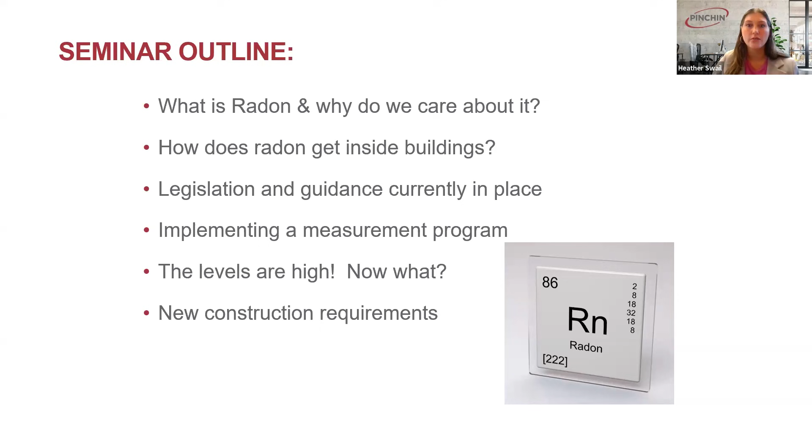And then finally, we'll wrap up with some of the new construction requirements that are in place for new buildings that we're building, and some proactive radon design considerations. That is our agenda for today.

So let's start with the basics. What is radon? You've definitely heard of the word because you're in this presentation today, but radon is a naturally occurring radioactive gas, and it forms as part of the decay process of uranium in soil, in rock, and in water. Even though it's a natural part of the environment, it's important to note that it's colorless, it's odorless, and it's tasteless. So we don't know if it's here without testing.

I think that's another reason why not everyone is an expert at radon already, and why not everyone knows the risks associated with it, is because we don't have someone to blame in this scenario. It's natural. The air you're breathing right now has radon in it. The problem is when it gets to really high levels and gets trapped in buildings, that's when it becomes hazardous. But when I compare it to asbestos, which I did earlier, that's something we put into buildings. That was something we could blame. But this is natural. It's something that was really no one's fault. It's just something in the air that we are breathing.

So as I said, radon is in virtually all of the air we breathe. It's indoors and outdoors. The issue is when it accumulates inside and we get those really high levels. That's when we see the significant health risks associated with radon, which we'll talk about on the next slide. Understanding this lays the foundation for the next sections, which we'll talk about, and we'll also go through how to measure it and mitigate it effectively.

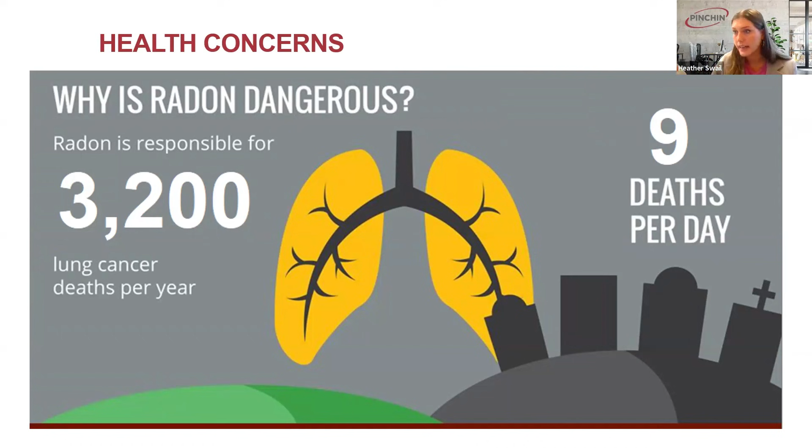So getting into the health concerns, let's take a closer look at how it impacts our health. I mentioned when radon breaks down, it releases radon decay products, or RDPs. They're tiny radioactive particles that can attach to your lung tissues when you inhale air. The RDPs continue to break down, releasing alpha particles, which is a form of radiation. These are highly energetic and cause significant damage when they come in contact with your very delicate lung cells. Over time, this leads to damage and mutations, which can increase the risk of developing lung cancer, particularly if you've had long-term exposure to these elevated radon levels.

And unfortunately, if you've ever met someone who's been diagnosed with lung cancer but never smoked a cigarette in their life, radon was likely the cause of that illness in that case.

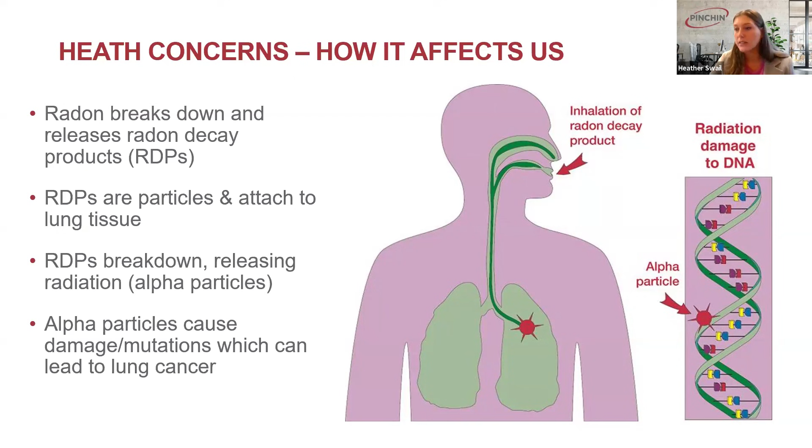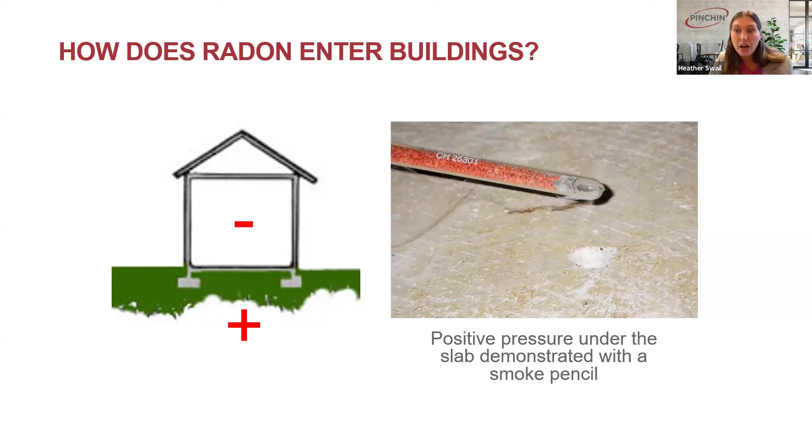In this slide, we show the concept of using a smoke pencil, which shows the movement of air and gas, making it a little more visible. You can see in this picture it actually looks like a neutral pressure. The smoke is slightly flowing to the side. I'm not sure if you can see my cursor, but it's definitely not going underneath the slab.

Whereas in this slide, this is what happens when a building is under positive pressure and the ground beneath the slab is under negative pressure. In this case, that's due to the installation of a radon mitigation system, which is creating a negative pressure underneath the building slab, pulling the radon gas from the soil and redirecting it away from the building through a venting system, which we'll talk about later in more detail.

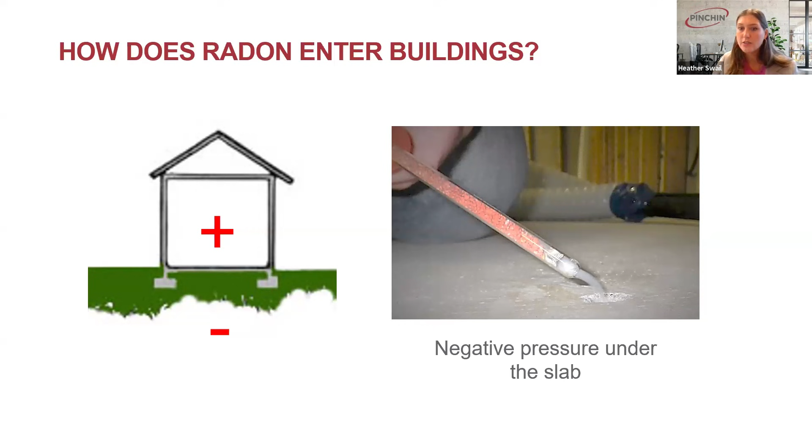But it's very effective. You can see in the smoke pencil on this slide, the smoke is very easily being sucked down through the foundation. This really shows the effectiveness, with your eyes, of how well radon mitigation systems work in a building.

One of the primary reasons revolving doors were invented was to manage air pressure differences between inside and outside buildings, especially for larger structures like high-rise buildings. Buildings with significant height or advanced HVAC systems often have pressure imbalances due to factors like wind, mechanical ventilation, or temperature differences. When buildings are under positive pressure, there's higher pressure inside compared to outside, so air naturally pushes outdoors and can make conventional doors difficult to open and swing.

They act like a barrier almost against escaping air. You may have noticed this before if you've ever opened the door to a building and it feels like a gust of wind is blowing out at you. That is the pressure effect. So that's why revolving doors were invented for these issues, so you don't get the feeling of being sucked in or pushed out of a building, depending on its pressure.

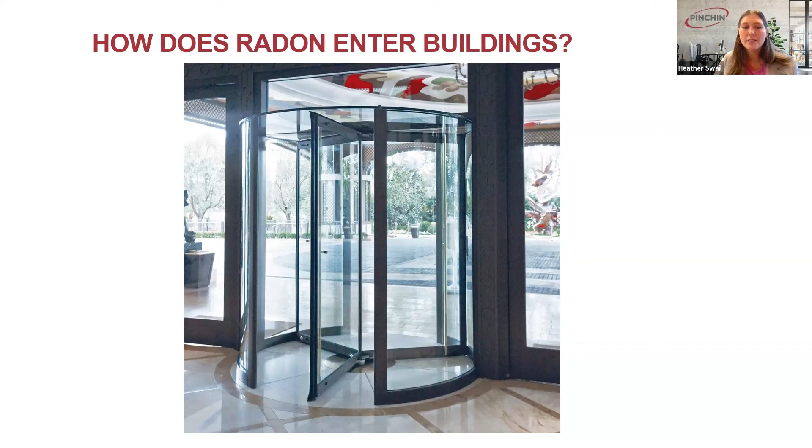Crawl spaces and sump pits are areas often exposed directly to soil, making them a significant source of radon entry. Porous concrete and masonry as well -- even solid-looking materials can allow radon to pass through. And finally, water sources: radon can dissolve in water supplies, particularly in areas with high levels of radon in the ground. This could be common in well water, which would release radon into the air during activities like showering, doing laundry, or washing dishes.

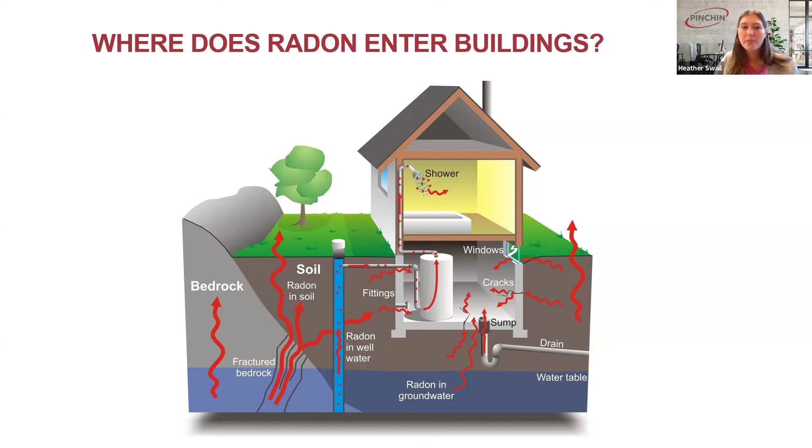Oh, sorry guys, I went backwards there.

The next slide is similar, but has one other visual I like. Footings and floor drains are also natural gaps in construction, which are connected to the soil area and usually unsealed, so that's another channel for radon.

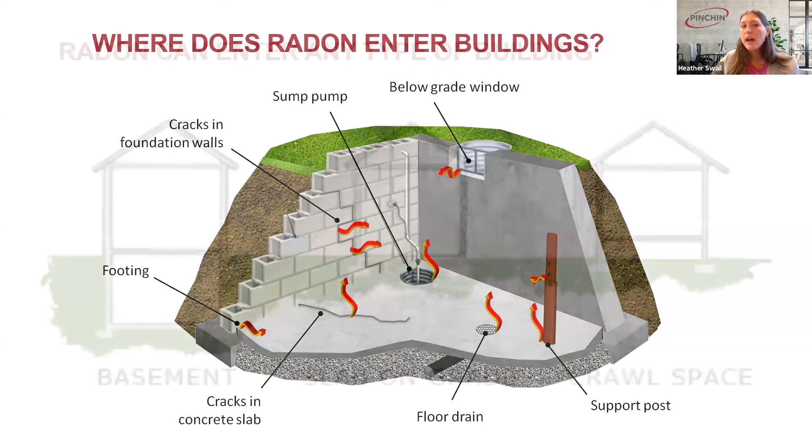So all of these points show that even the most well-sealed building has the risk of having elevated radon. It's important to understand that radon does not discriminate by type of building. Regardless of construction or foundation type, radon can be equally prevalent in a building with a basement, slab on grade, or a crawl space. The key takeaway is that radon entry points do exist, and the only way to determine if radon is inside your building is to test it.

One little joke I tell in some of these presentations is that there's really only one building I would recommend you don't need to test. If anyone on the line wants to get creative and throw in the chat what they think that building would be, we'll see if anyone's brains are turned on. I'm on the West Coast, so it's pretty early for me, but maybe the East Coasters are a little more awake and creative.

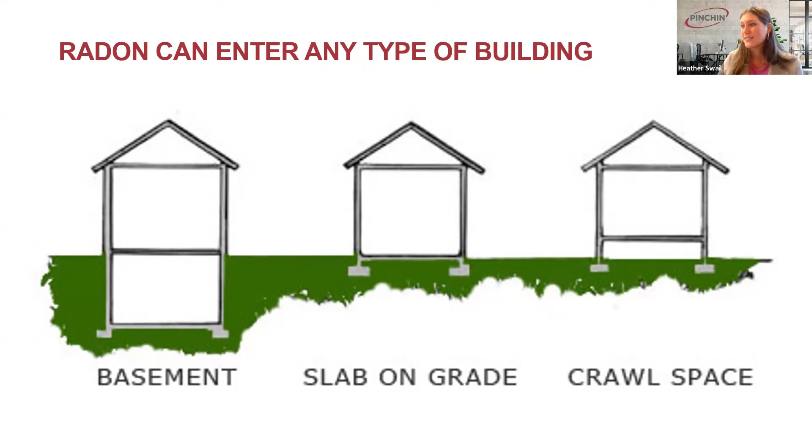Excellent, Chris typed in a floating house, and that's exactly right. So if it was a tree house or a house on stilts, yes, if there is no contact with the ground, there is not a risk of radon. That would be the lowest risk to test. But if your building is in contact with the ground, radon testing is what I would suggest. Thanks for participating, Chris, I appreciate that.

Now we'll talk about how radon is distributed throughout a building. The highest concentrations are usually in the lowest level, which could be a basement or your first floor, depending on the building layout. That's because that level is closest to the ground where radon originates, and it's often closest and connected to radon pathways, like the sump pump or cracks in the foundation, as mentioned earlier.

As we move up the building, to the next floor up, radon levels usually dilute from 40 to 60% lower than the floor below. That reduction occurs because of dilution, as the radon starts to get mixed with the other air in the building. Also, mechanical ventilation is usually on the main floor, which can help disperse radon.

As we move up further to the second floor and above, we're close to outdoor levels. The radon has been even further diluted as it travels upward, and it's furthest from the source. So as we move up a building, we get less and less radon. Another interesting thing to point out is if your building has elevators — elevators can distribute radon throughout the building, as it sucks up the air with it.

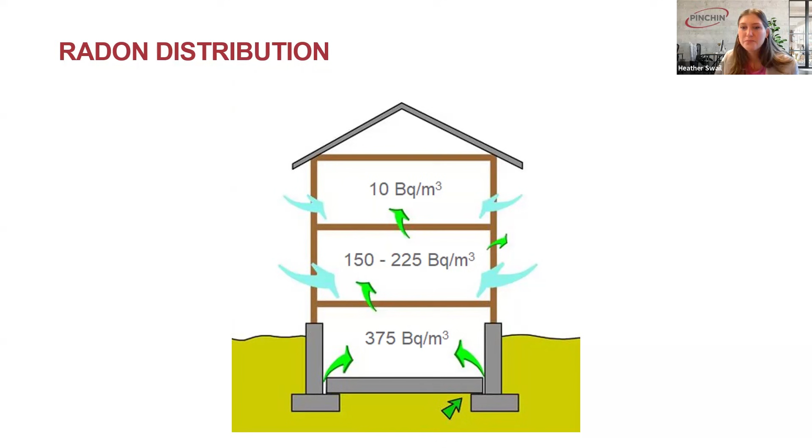When we talk about a comprehensive radon testing program, it's really essential to understand that one test is not sufficient for testing your building and knowing if you have a radon problem. It could have been very easy in this school to have missed a large problem if we'd only deployed one or even several detectors — we could have easily missed the problem here. I've had some questions in this presentation before about why this happens, and there's a couple of possibilities in this case. One is the proximity to radon entry points.

Rooms located near cracks in the foundation or utility penetrations, or areas poorly sealed like sump pits and crawl spaces, are more likely to have elevated radon levels. There's also ventilation differences between rooms.

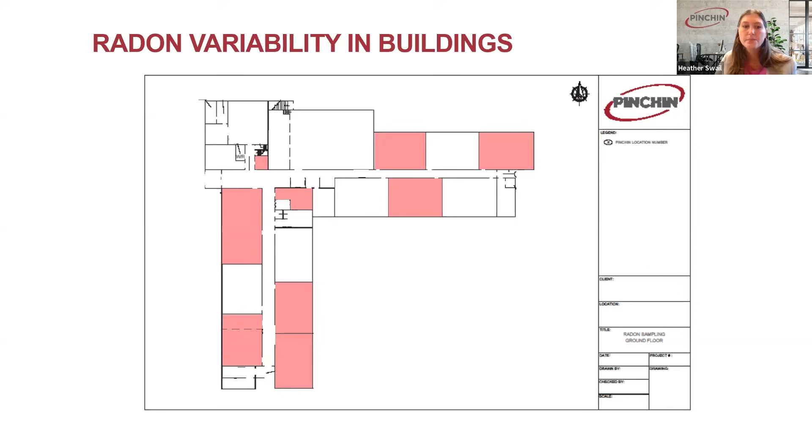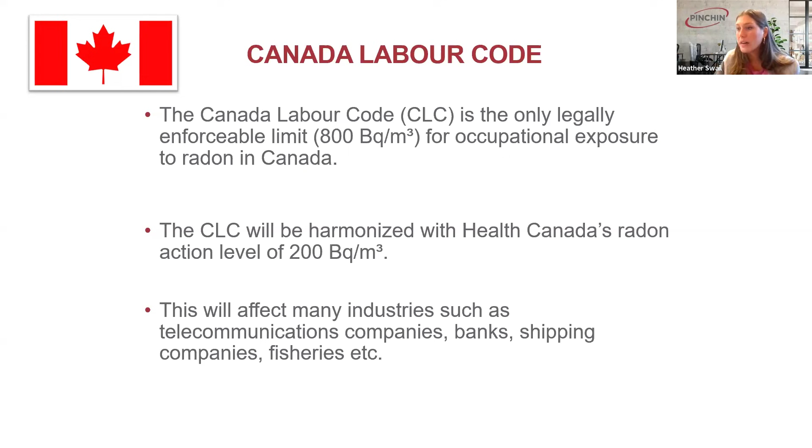Hey Heather, just to interrupt you for a second, there's a question in the crowd. There's a question asking what the units of radon concentration are. In Canada we use becquerels per cubic meter—you are a very critical thinker on the ball. We have a slide coming up in 4 or 5 slides that covers the units and guidelines here in Canada and the US. Thank you for being on the ball.

Right now we'll get into the exposure guidelines for radon. We'll start with the Canada Labour Code, then compare them to Health Canada coming up in a few slides, which is directly related to this question, so your timing is impeccable.

Currently, the Canada Labour Code sets the permissible radon exposure limit for federally regulated workplaces at 800 becquerels per cubic meter. That threshold is based on old standards—it's quite outdated and doesn't align with Health Canada's guideline, which recommends indoor levels not exceed 200 becquerels per cubic meter. Recognizing this discrepancy, the federal government has proposed amendments to the Canada Labour Code to align it with Health Canada's 200 becquerels.

We're actually expecting that alignment to occur this coming year. So if you have a federal building, there is a regulation upcoming that will lower the limit to 200 becquerels, matching Health Canada's current guideline. If you're a building owner with federal tenants, or a federal workplace, now might be the time to test to get ahead of the Canada Labour Code change.

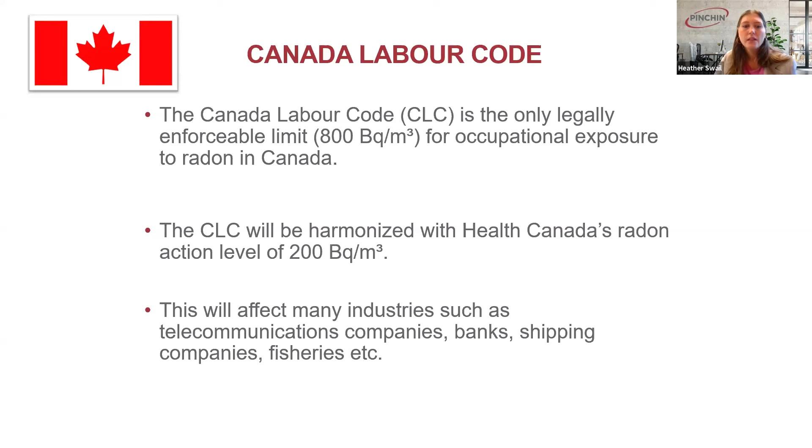So just some other interesting places that have regulations for radon. The Yukon is actually a huge leader at the forefront of radon, taking significant steps to address radon exposure. What's notable here is they're requiring testing and mitigation in childcare centers as part of their licensing requirements.

That applies to all new and existing childcare centers. The Yukon is also conducting radon testing in schools and government workplaces—they're really leading the forefront of the radon charge.

I didn't see anyone in the line here from the Yukon today, but it's very, very interesting that we have a leader here in Canada.

Some regions like Yukon, Prince Edward Island, New Brunswick, and Saskatchewan have achieved 100% radon testing in their publicly funded schools, showing a really strong commitment to ensuring a safe environment for students and staff.

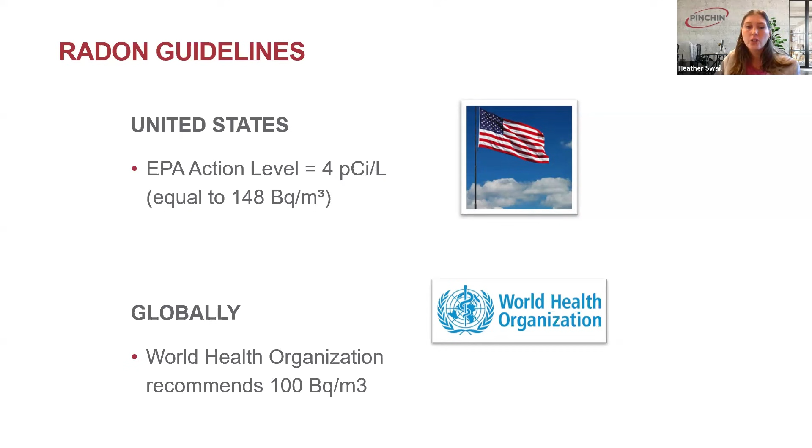Health Canada has developed comprehensive guidelines for radon testing to make sure that the testing is done accurately. They have guidelines for residential dwellings and for public buildings. We'll talk about both of them a little bit.

So in residential dwellings, in homes, James, you have a question about whether there's a way to encourage schools to perform testing?

That's a great question. With some of the schools that I work with, they've done testing based on community suggestion or community complaint. That's been the most effective way I've seen testing being completed in schools so far. It's brought up at board meetings and so forth, and that's encouraged some schools to get ahead of the game.

Just diving back into residential dwellings. A radon test should be done for a minimum of 3 months. It's not a quick sample where we grab an air sample and send it to the lab. It's a long-term test recommended for at least 91 days.

Where it should be located in a home is in the lowest lived-in level of the home. If your home has a finished basement, maybe your office is down there, or there's a kid's bedroom, you should test that room. Any room where people are spending 4 hours or more a day. If you don't have a basement, you test whatever occupied room is at the lowest level.

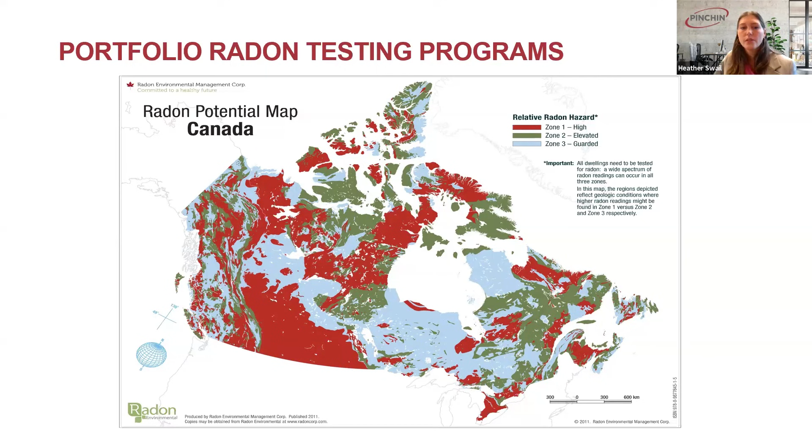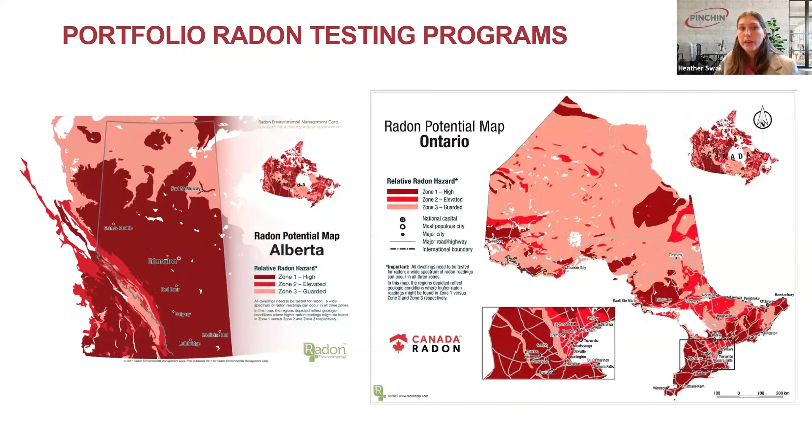So further, that was the map of Canada, but a lot of provinces in Canada have their own breakdowns as well. In this photo, we have Alberta and Ontario. In the next slide, we have Manitoba and British Columbia. This is something you can Google. Radon Environmental has put out this data, and it's something you can access for free, I believe. This helps us break down within each province as well.

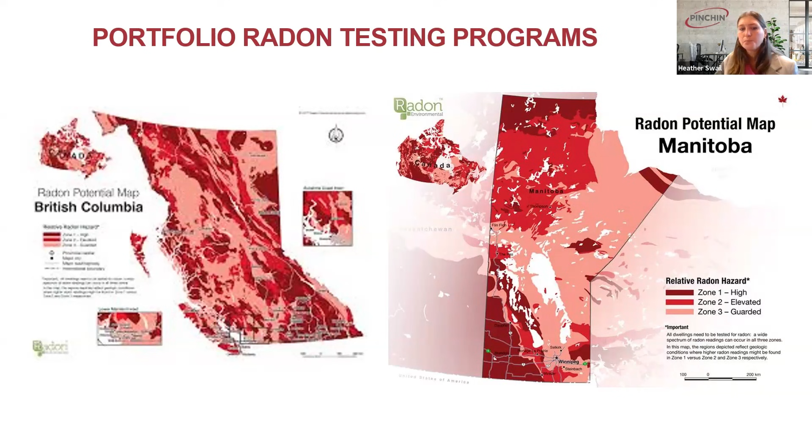Beyond just that soil data, we'll look at some more building information to help prioritize the building. We'll look at the building type to determine the age, when it was built, if it's a tight, well-sealed construction, or an older, leakier building with more air exchange. We'll also evaluate if there's an HVAC system, how it's designed and operated, and what the ventilation rates are. We'll see if there's any exposed soil in the building - is there an open floor crawl space with exposed soil? Is there a sump pit? And lastly, building height is also a factor.

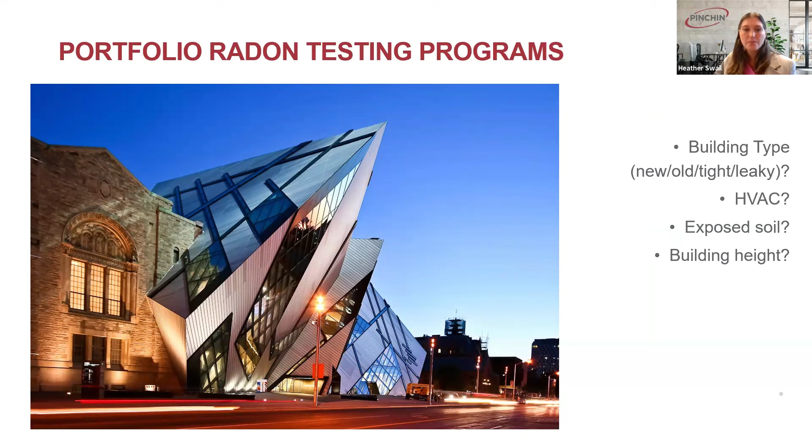Radon is typically highest in the lowest areas of the building, so basements and ground floors. The more floors it has, the more radon can disperse - we talked about it diluting up a building. That's another thing we take into account when looking at a large portfolio. So it's really important to understand all of these factors to develop a tailored testing program for our clients.

We'll get into testing in the next slide, but something I think about: I hope all of your buildings have carbon monoxide detectors, smoke detectors and smoke alarms. This is the next test you need to have in your buildings - doing a radon test for that same purpose, to ensure the occupants' health and safety.

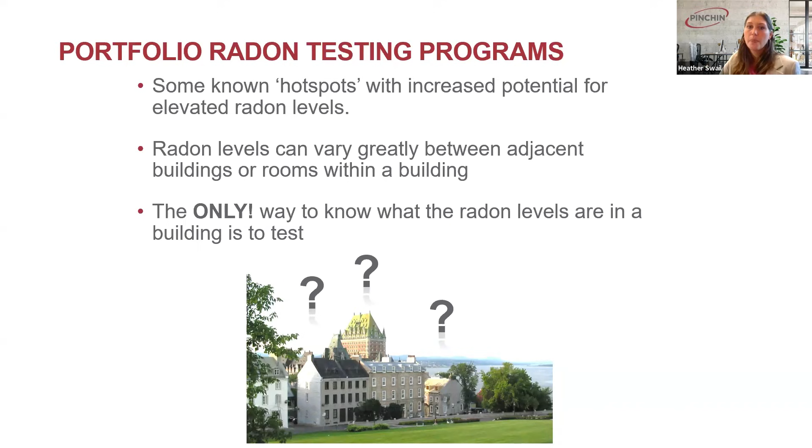Getting into the actual measurement now, we discussed the locations. Let's talk about the tools we use. Health Canada recommends a long-term test, as I stated, a minimum of 91 days. It's also recommended to do this testing during the heating season, so typically right now is a good time to test. That's important for a couple of reasons: first, windows and doors are typically closed, which limits ventilation and allows radon to stabilize indoors. Also, we have a greater stack effect, a different pressure in the winter. So we're testing under the worst case scenario - that's why testing in the winter is really key.

Something really great about these is radon testing prices - it's very inexpensive to do radon testing in your building. You can buy them in bulk, so price will range depending on how many you need, but they're quite inexpensive, anywhere from about $25 to $30 a test. So really, even testing the full footprint of your building is not going to put you too much out of pocket. At the end of the testing period, the alpha tracks go to a lab and a report is generated with your radon test results.

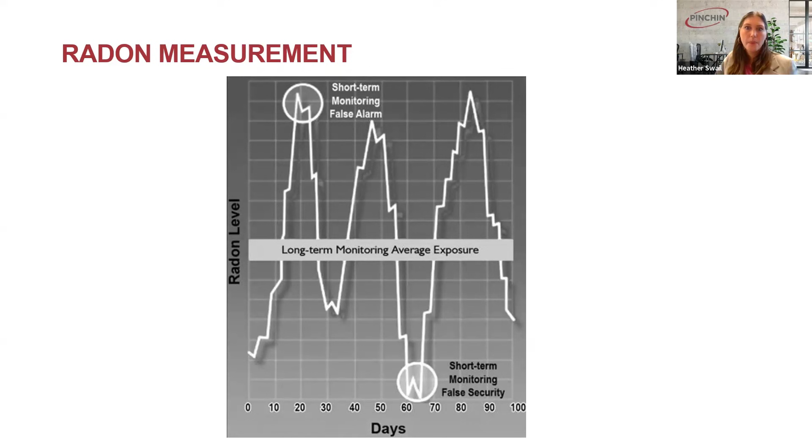So how do we mitigate buildings? I've convinced you it's essential to test your buildings for radon, and now you found out your building is high. What do we do? First, we'll talk about the role of HVAC systems. It's an effective strategy for mitigating radon in buildings, involving leveraging the HVAC system to control radon levels through pressurization and ventilation. HVAC can help create positive pressure inside the building, which prevents radon from being drawn in from the soil beneath the foundation. That is the primary way this happens.

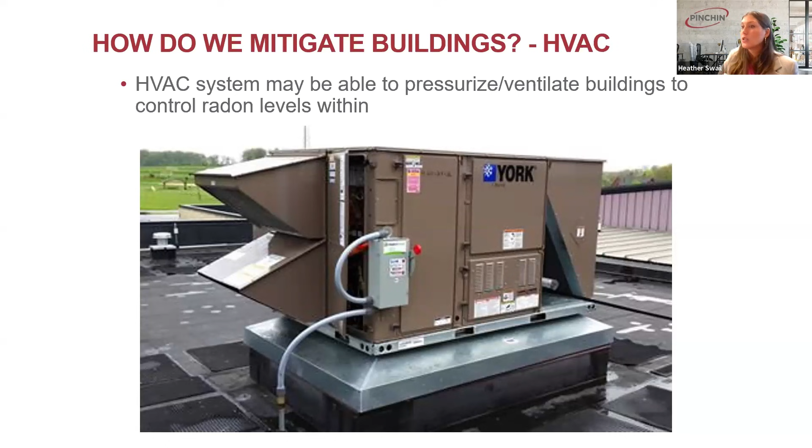You can also improve air exchange rates, diluting indoor radon levels by bringing in more fresh air. You may have heard the saying, dilution is the solution. It can be an effective way to reduce concentrations. But some considerations: it depends on the design and capacity of the HVAC system, as well as the building size and layout. Any HVAC adjustments need to be carefully calibrated so you're not creating unintentional pressure imbalances that could draw more radon into the building. We have seen that happen before, unfortunately. In some cases, a dedicated mitigation system, a subslab depressurization system, is necessary in conjunction with HVAC systems. It could be considered as a standalone plan, but you might need to do it alongside a subslab system, which we'll talk about next.

It can reduce radon levels by 99% in most cases, so it's reliable, it's durable, it works really well, and it's relatively simple to operate and install as well.

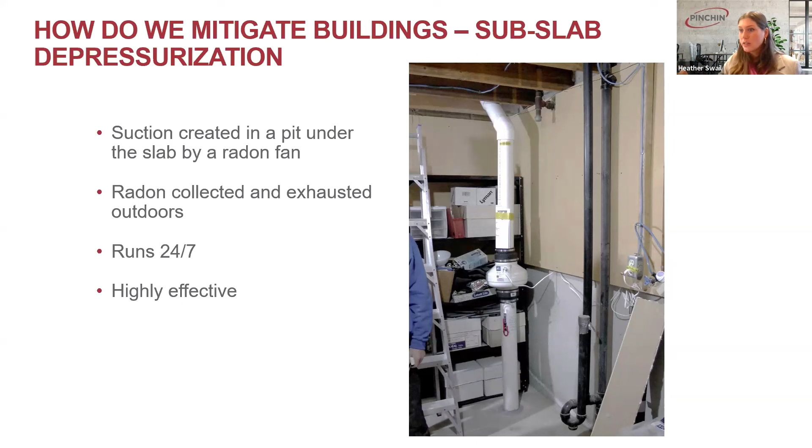This is a typical system that we would install in a large building or a residential setting. In a larger public building, we might need a couple of systems to cover the full footprint, or we might need a larger fan. That's why it's important to hire a C-NRPP certified person to do this design, to make sure you're covering your whole building and not just a room or two, a solution for your full building.

Looking at depressurization, one of the first slides I showed you was the positive and negative pressure. When a mitigation system is on, you're seeing this smoke pencil in the lower photo, where the smoke is going beneath the slab, creating suction underneath the slab. In the before picture, radon is getting into the building, and afterwards there is a suction pit beneath the slab, and it's exhausting outwards.

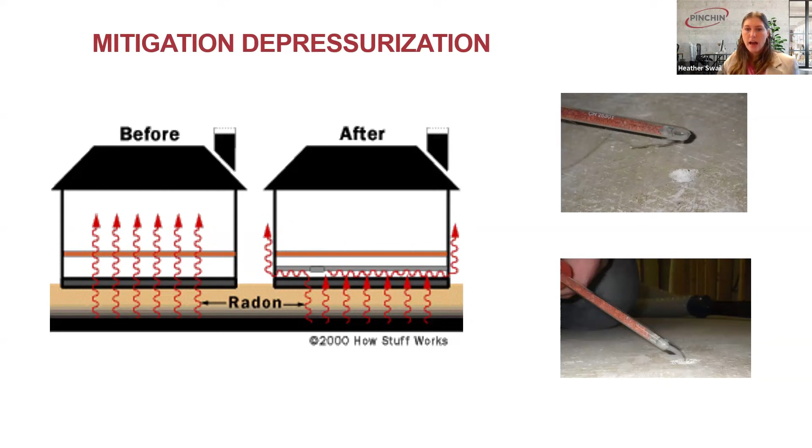Before I was with Pinchin Richmond, I was with Pinchin in Winnipeg, and we would have to do this sidewall discharge because in -40 you get a lot of icing up problems and you need your system to work effectively. But in most more temperate climates in Canada, we would be using the roof design instead. In Canada it's usually going to be one of these systems. If we were in a southern state, sometimes they would put the fan on the outside of the building as well. But because all of Canada is in a colder climate compared to Texas or Florida, we need to keep that fan working in an area where it's not going to shut down because it gets too cold.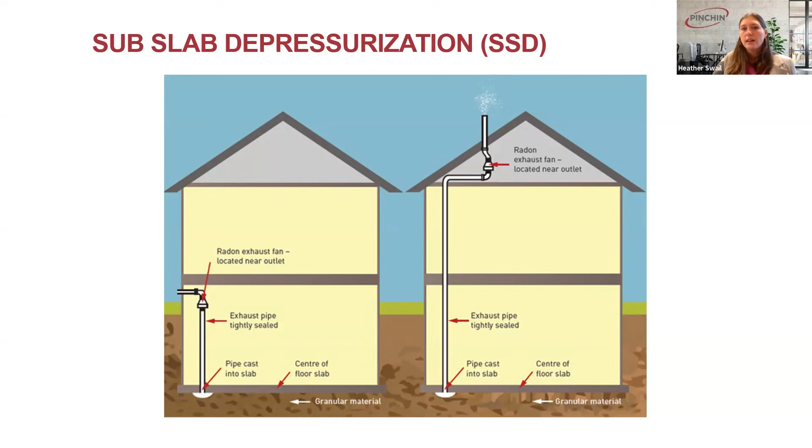And this is what it looks like. The radon mitigation systems are prone to icing up if you don't put it in the right area. There's a lot of condensation that comes from these systems, so they're moving quite a bit of moisture. And if you're in a very cold climate, you will get this icing up problem, and there will be fan damage and reduced performance.

Is the system available for retrofit? Yes, you can install a system in an existing building. That's very common. And we'll talk about new construction and how we're incorporating that as well coming up. Thanks, James.

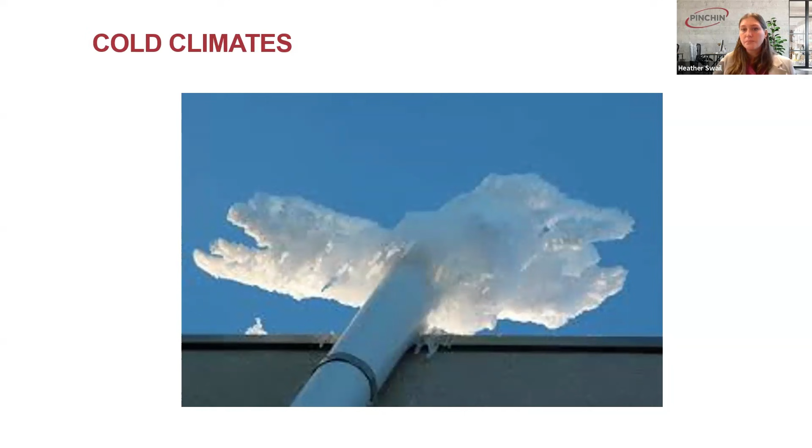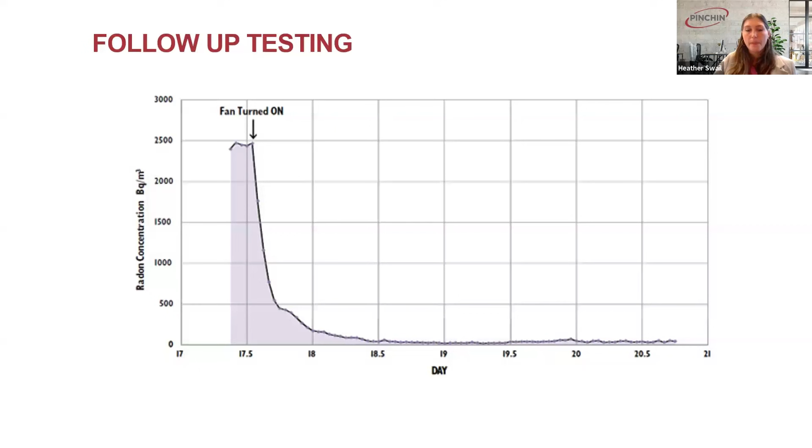Now we'll speak about readily remediated new construction. This is what we're doing for new builds, for buildings that haven't been built yet. These techniques are a critical part of radon design and construction to address radon entry before occupancy. In the previous designs I showed you, that's what we would do in an existing building, and this is what we're going to do during the building process. So there's two things to talk about, a passive versus an active system. Radon new construction typically involves a passive radon mitigation system during this phase, which allows venting piping from beneath the slab to let radon naturally escape to the outside without requiring a fan.

It's very cost effective, and what's good about it is if you test the building afterwards and radon levels are high, it's quite easy to add the fan later and finish the system. So you're really already halfway there in that case.

However, some of the cons we've seen with this is that if this has to be designed as well, a senior person needs to be incorporated into this design, because we've seen the passive systems being installed in inappropriate places, for instance under a stairwell. Well, if the radon system is high, we're not going to drill to finish the system through your stairwell to attach a fan and go all the way up. That doesn't make a lot of sense. It has to be thoughtful and effective when installing these systems in the design process.

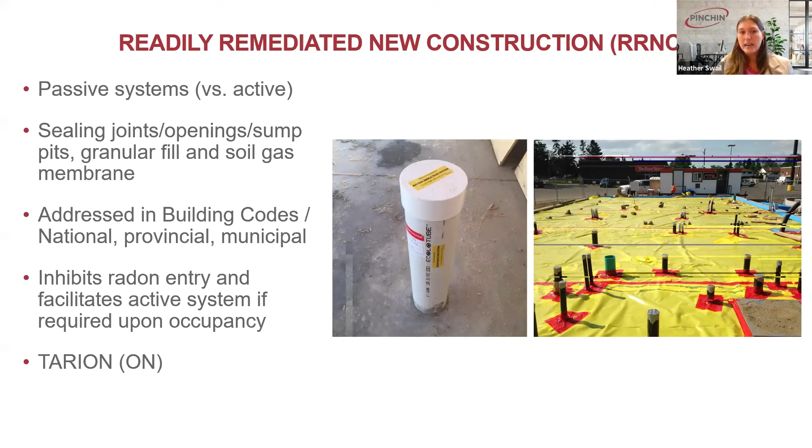So talking about certification, I've brought up CNRPP a few times, the Canadian National Radon Proficiency Program. It's Canada's leading certification program. People with the CNRPP certification have gone through extensive training courses and exams to demonstrate that they are well versed in this field. Also, the mitigation side, people installing systems, they've gone through a practical session with certified instructors detailing that they know what they're doing.

It's extremely important for both mitigation and measurement that you are using someone who is CNRPP approved. I've dealt with a lot of clients who have thought they've tested their building before in-house, and they've placed their detectors in inappropriate places that have given false highs and false lows before, and they essentially wasted their money having to test it again properly. So make sure who you hire is someone with this certification.

Everyone with this certification has a certification number that is available for you to see, kind of like a police officer, we all have a badge. And if you want more information, if you're interested yourself in getting CNRPP tested, cnrpp.ca is the resource. It will walk you through where the courses are, what the exams are, and what the cost is for these courses. But the take-home message is really just to make sure you're going with someone that knows what they're doing, so that you're effectively accurate in testing your buildings, and you're having an effective solution if you do have a problem.

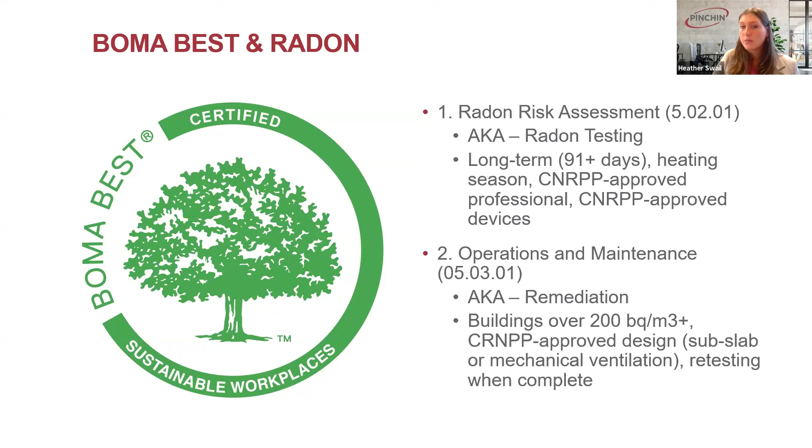Just to close it off before we take some questions, a few key steps to address radon in your buildings: develop a testing program, whether you manage a single building or a portfolio of buildings. It's time to develop a comprehensive radon testing program, because the only way to know if there is radon in your building is to test. There is a misnomer that my area doesn't have radon, we're not at risk here. The short answer is we don't have enough data for me to confidently tell you that today.

Also, use CNRPP professionals for both testing and mitigation. Use an expert that is trained to do this so you're getting accurate results and effective solutions. And also test your home too.

We've spoken a lot about buildings and workplaces and schools today. I've based that off of the audience I'm speaking to, but your home is also important to test. We spend a lot of time at home. A lot of us are working at home now too. You only need one test in your average house to make sure that you're safe. These are available on our website for homeowners. If you go to pinchin.com, this is something that you can order. It comes with instructions, and as I mentioned, it's pretty cost effective to do this test.